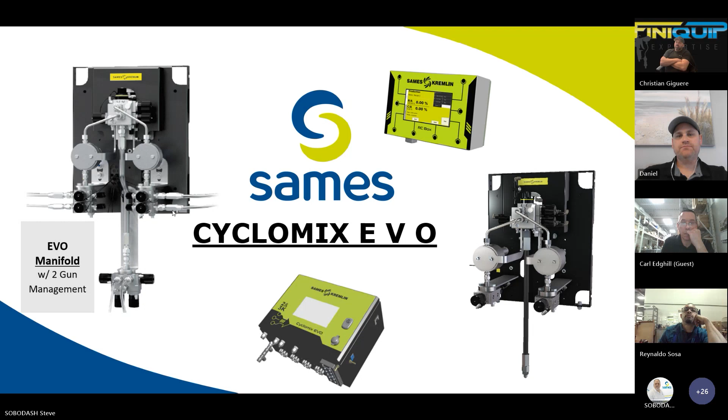We will start with the specifications of the EVO. It can be used as a 1K for just tracking consumption, or 2K and 3K for component mixing. It has compatibility with base solvent, acid catalyst, polyurethanes, and epoxies. The unit is capable of up to 99 different products, consisting of your A, B, and C components combined with solvents. So anything up to 99, this machine can handle.

You can log up to 250 different recipes with ratios ranging from 1% to 200%. Flow rates from 50 to 7,000 cc. The EVO can mix material up to 3,000 centipoise and is feeding 2 circuits up to 240 bar.

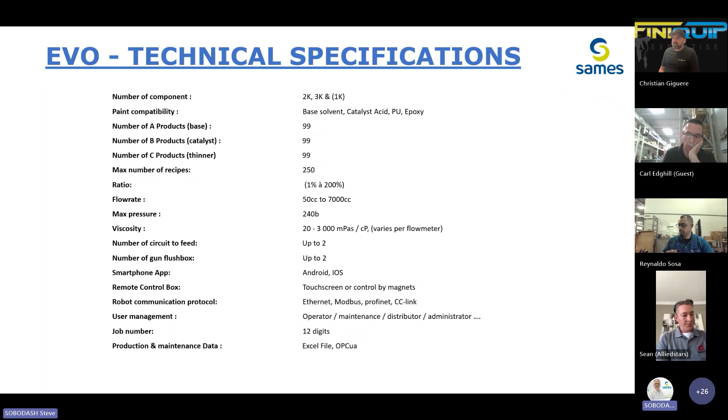There are smartphone apps that can be used on both Apple and Android. The control box is controlled using a touchscreen interface, and there is also a remote box controlled using magnets. External communication can be done with either Ethernet, Modbus, Profinet, or CC-Link. There are also 4 different password-protected management screens: operations, maintenance, distributor, and administration.

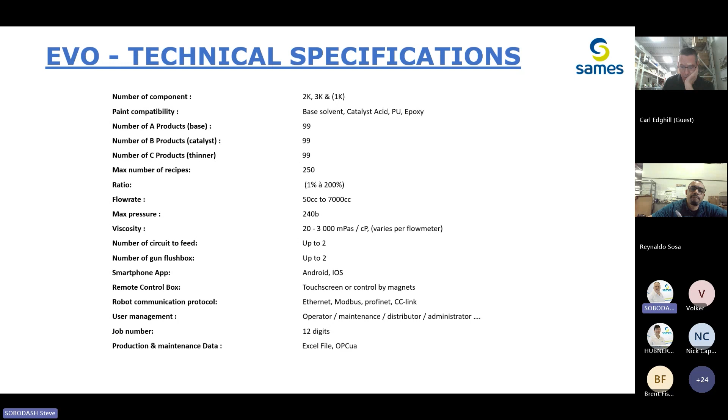You can also calculate production and maintenance data that can be printed off or viewed. The naming of the jobs can have up to 12 digits.

Our EVO base model is comparable with the previous Cyclomix Micro. It's a compact manifold and controller, allowing 2 A-side, 2 B-side components, along with 2 gear flow meters, a mixing block, and static mixer with elements.

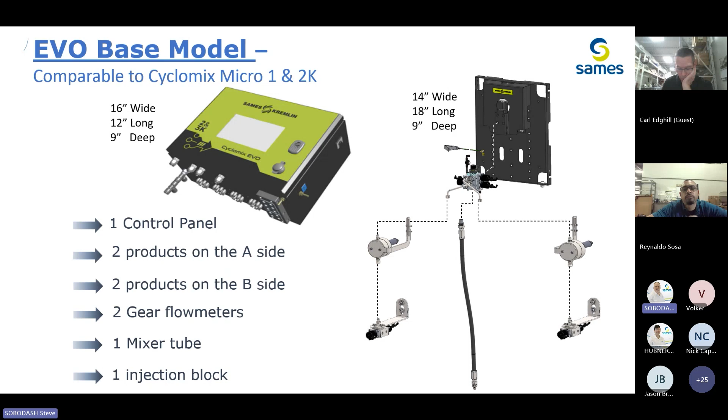Our standard 3K machine comes with 5 A-side color change valves, 2 B-side, 1 C, along with 1 A-side solvent and 2 B-side solvents. It will have 2 gear flow meters, one mass flow meter, and 2 regulators with pressure gauges. This unit will use 4 mounting plates to create the entire manifold.

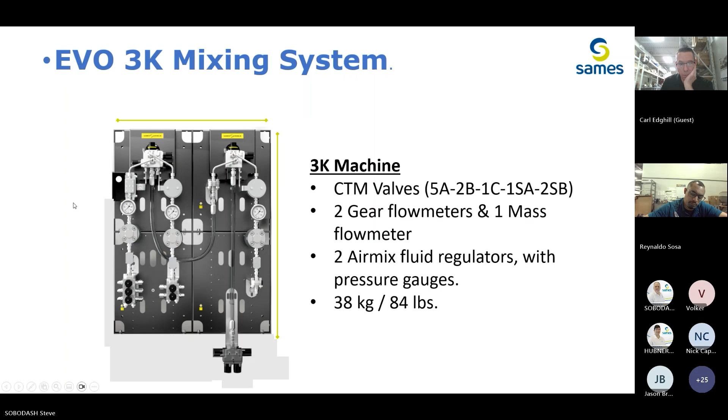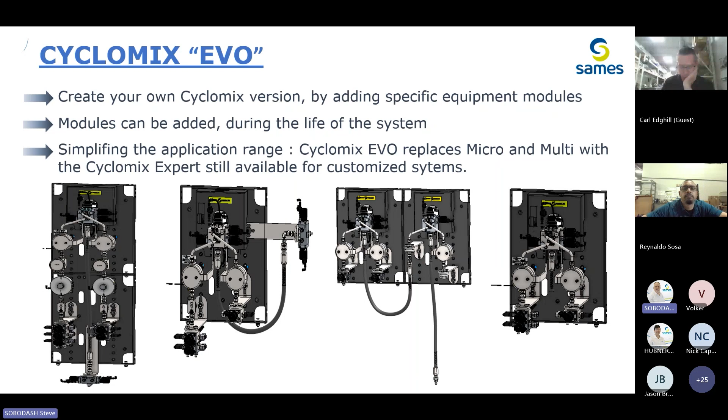The EVO is the most modular mixing system Sames has ever developed. You can create your own specific version of the EVO by adding mounting plates and modular components. This allows for many changes to your system during its lifetime and replaces the previous Cyclomix Micro and Multi, with our existing Cyclomix Expert still available for special customized systems. It will also eventually be replaced by the EVO system within the next few years, but until then, the Expert is still available for special situations.

Speaking to the modularity of the systems, the amount of color change and injection valves, filters, or fluid regulators can be added, along with pressure gauges and sensors. You also have a selection of flow meters to choose from and can select 1 or 2 gun management.

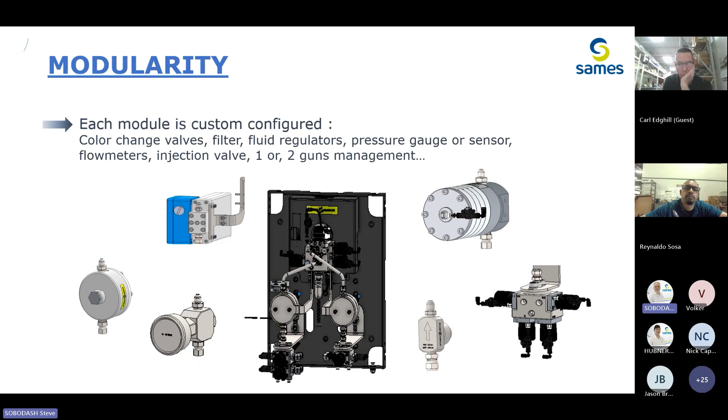Next, we have some of the main configurable parts. There is the entire injection block, the injection valve itself, the injector tip, different versions of flow meters, filters, and air piloted regulators.

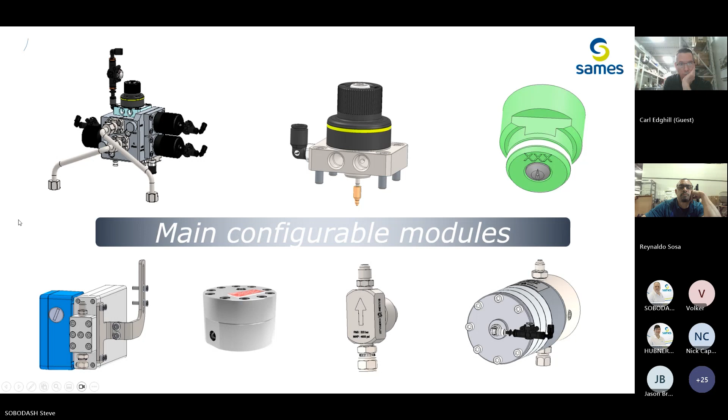For our meters, since we provide both standard and pH versions of the EVO, there are 303 stainless meters and 316L stainless steel versions for acid catalyst. Mass flow meters for 3K, and in the future, a choice of fiber optic flow meters will also be available.

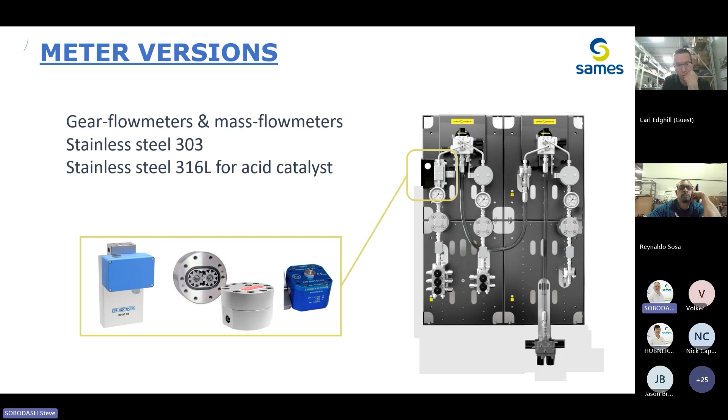Now for the most impressive aspect of the new EVO system. The patented mixing block is a compact stainless steel block to help with pressure loss, allows easy flushing, and comes in both 303 and 316L stainless for the pH versions.

The vertical alignment of the paint circuit on the manifold allows easier flushing and accessibility for maintenance than our previous Cyclomix Multi.

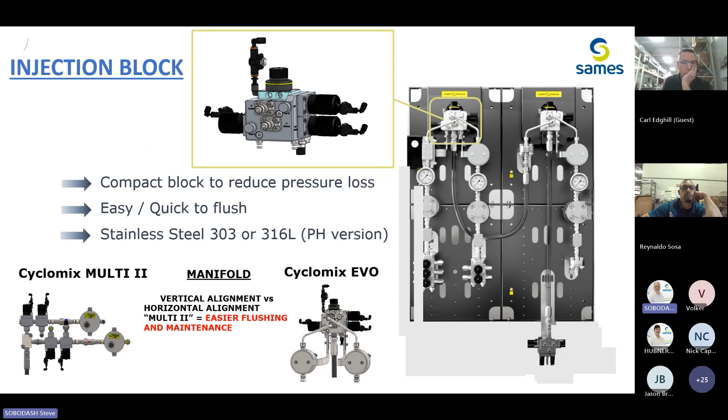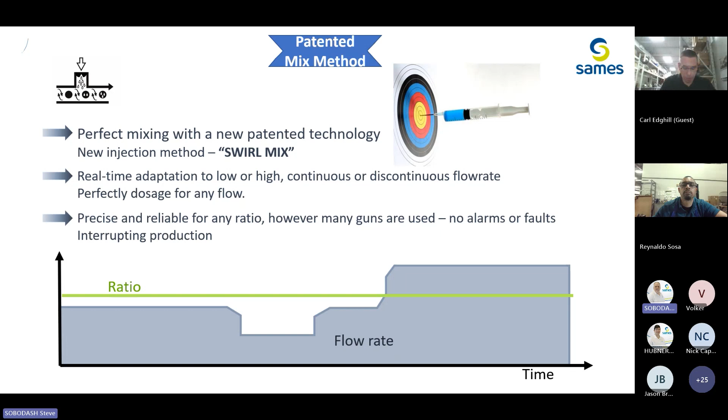The patented mixing method is called Swirl Mix. It provides real-time adaptation of the injection, regardless of flow rates, allowing for precise, reliable mixing, regardless of how many guns are used, and can continually run production without faults or alarms.

Now to explain our patented mixing process. The inlet orifice of the base side is eccentric, meaning off-center to the hole or port. This creates a swirling effect as it passes into the mix block port.

The catalyst is applied via injection spray using a version of our air mix tip nozzle. This mixing method is opposite of previous ways: the catalyst is sprayed first, then the base catches it in its swirling motion. This creates a better dynamic premix of the material, allowing less length of mixing.

The EVO injects on a time-based process instead of flow-based. This is called gain. These processes are proprietary and patented.

In internal studies done by our factory, this method was found to not need a mix tube, as the material was sufficiently mixed without using mixing elements. We would never suggest this, but it goes to show the thoroughness of this mixing method.

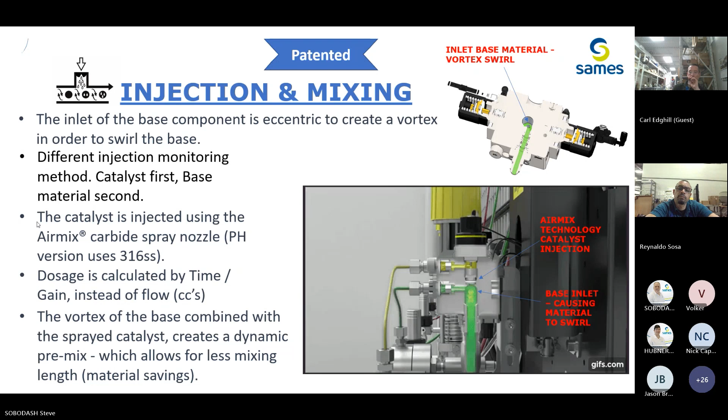The injection block itself is designed with minimal parts and simple maintenance upkeep. The injection valve sits on top with the injector tip mounted underneath, threaded into the block. There are mounting ports for the A and B test valves and the air chop on the sides of the block, with needle valves for batch material and ratio testing mounted in the front.

The fluid inlet fittings, along with the air chop fitting, are actual cartridges mounted with screws instead of threaded into the block. Behind each fitting is a ball and spring check valve. As stated earlier, all components are easily removed for quick maintenance and cleaning.

The new version injection valve is the exact version of our airless ASC gun. It has a quicker activation time than the previous CTM style injection. There are 2 lubricating ports to help keep the shaft and cartridge clean of paint buildup.

There are 2 versions of needle cartridges, in both PTFE and GT style, with the shaft made of 316L stainless steel for better longevity when used with acid catalyst.

Also, the cylinder cap is significantly easier to remove and install than our previous CTM cylinder injector.

The injector tip, as stated, is identical to our air mix gun tips with a seat, seal, and screw holder. The tip is carbide with a stainless steel seat holder injector. The size of the tips are identified on the seat holder itself, just like our standard air mix tips.

They come in 3 different sizes of carbide: 0.61, 0.76, and 1.04 millimeters, with a 2.0 in 316L stainless, which is standard for any acid catalyst version.

There's only one compact Cyclomix EVO control panel. It has a 7-inch touchscreen for any version of the EVO.

There's an additional panel with extra solenoids that can be added to allow 35 more pilot valve outputs. This control panel can also be configured to upgrade existing Cyclomix micro systems, allowing more functions and ease of use than the micro controls previously.

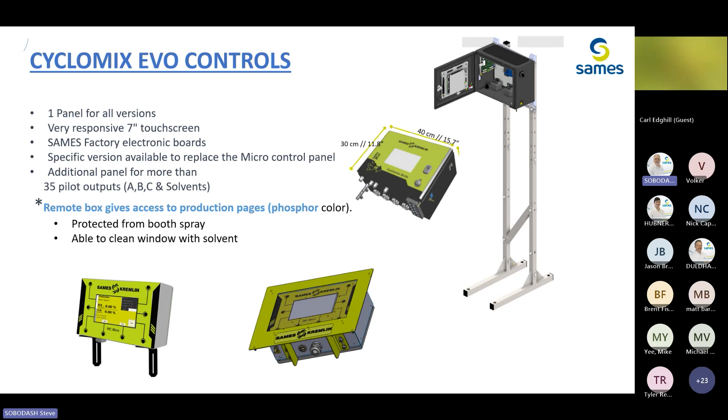A booth-mounted control box is also available for operator use inside the booth.

The main control screen has 6 different function categories and is intuitive and easy to use, even for the most inexperienced users. There is an automatic mode for simple parameter settings, which allows quick startup time after all configurations are entered.

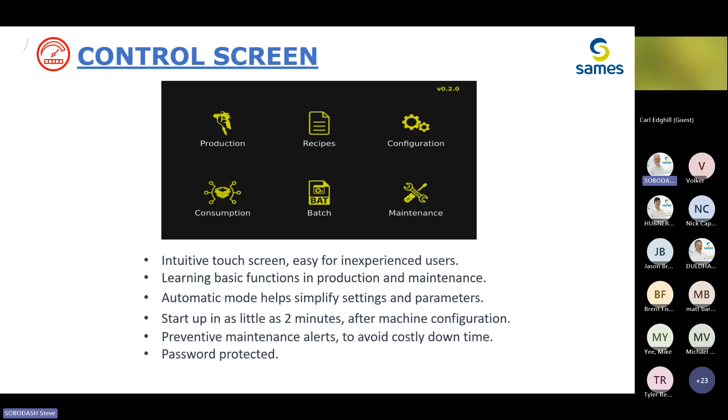The access can be password protected to allow different levels of access for operators and management. Preventive alerts for maintenance levels allow for less downtime due to part failures.

Now, regarding the simplicity of the automatic mode, operators will enter how many components are used, the mix ratio, and the pot life. The EVO will then manage all the mixing, production, and flushing parameters from that point on.

For technicians or operators that are more experienced, there is the ability to manually adjust all parameters for more physical control.

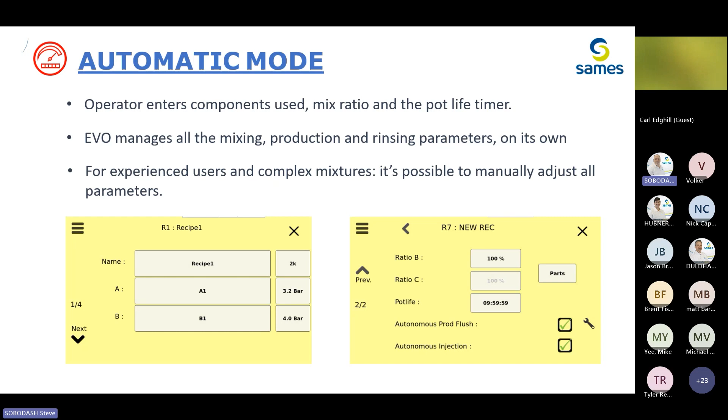With the Cyclomix EVO, there is a new paint optimization method by spraying new mixed material directly following the solvent and current recipe material. You can also push color with color, or push current material with new material. Both of these options can result in anywhere from 3 to 10% less paint consumption.

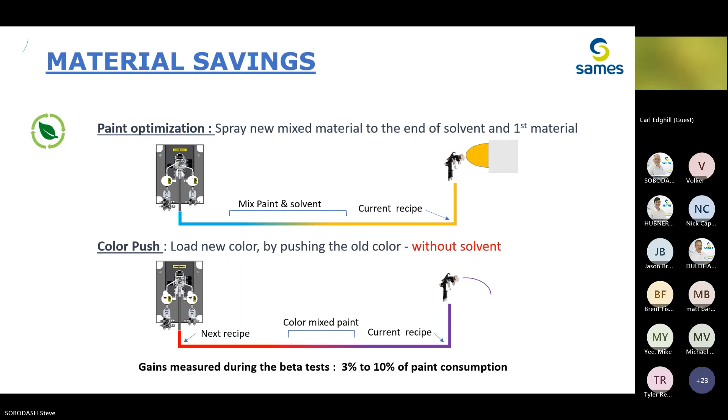Part of the configuration and ordering of the EVO is the addition of mounting stands for both the fluid panel and control box. There are also clear protective covers that can be purchased to safely surround the manifold.

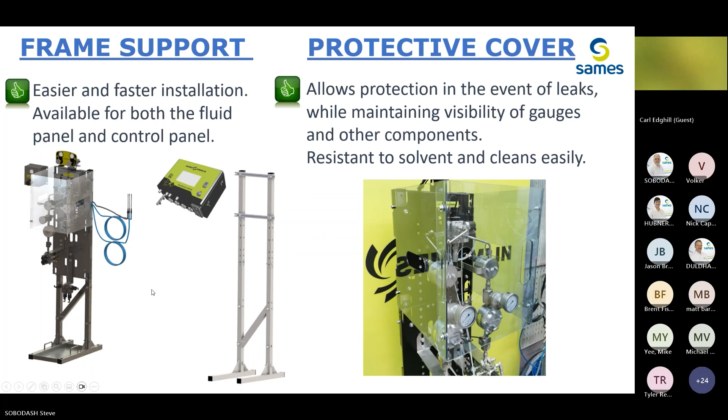Now to show some of the optional equipment that can be incorporated into the system when ordering, or that can be purchased after the sale.

The EVO inlet air must not exceed 6.5 bar or 95 PSI. This air regulator kit, shown with ball valve, gauges, and filter, can make controlling the supplied pressure much easier.

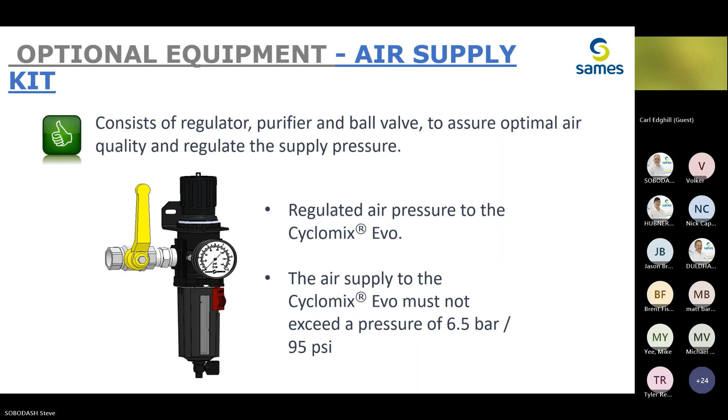We now have mini inline filter assemblies that can be added to the EVO. These mini filters allow for quick replacement and cleaning. They use the same style screens as our Xcite gun filters and can be used in place of or in combination with our super filters.

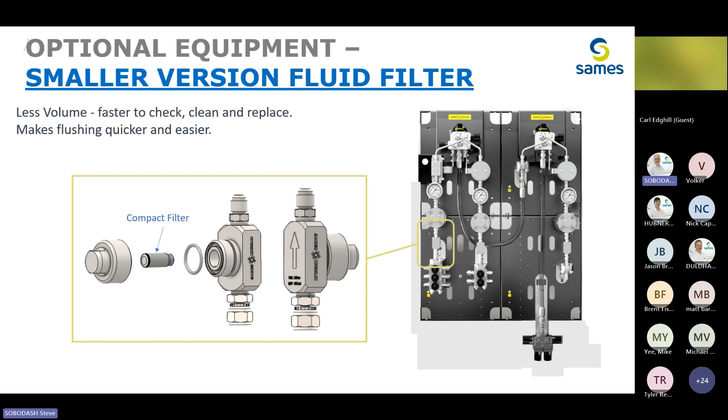There are two versions of dump valves that can be added: one for positioning over a waste barrel, and the other for if you cannot position over the waste barrel, which would allow the supply hoses to be flushed after priming.

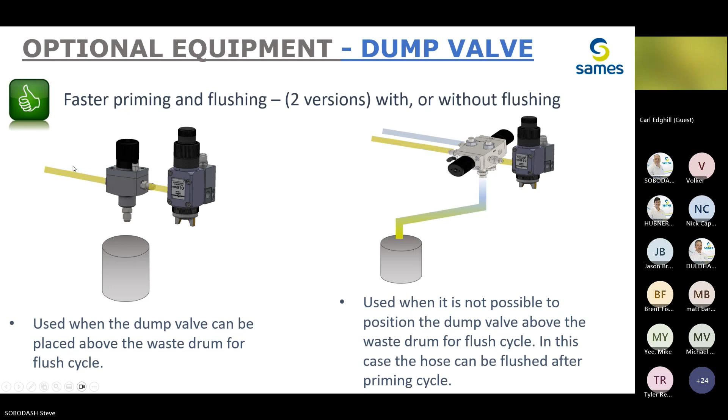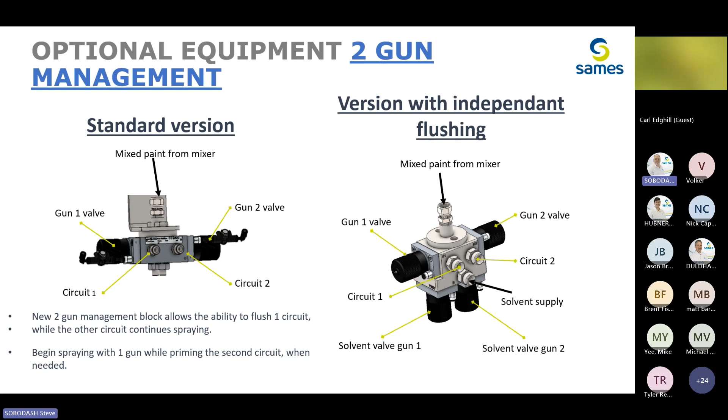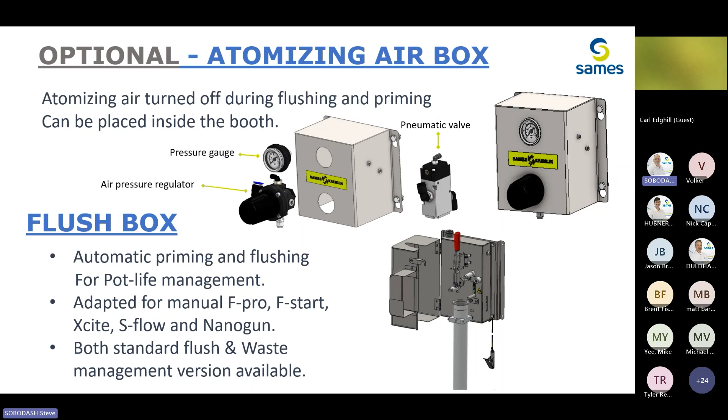Another great feature of the EVO is that it records paint consumption, all valve operations and paint volumes, along with the pressures running through the system.

Soon there will be the ability for cloud-based information storage. It will have a dashboard with shareable information that can be used to control the status of wear parts and help the customer and distributors adapt their inventory levels. You can access the data by inserting a USB memory stick into the control box. A download screen will then appear and instruct the user on how to retrieve the data.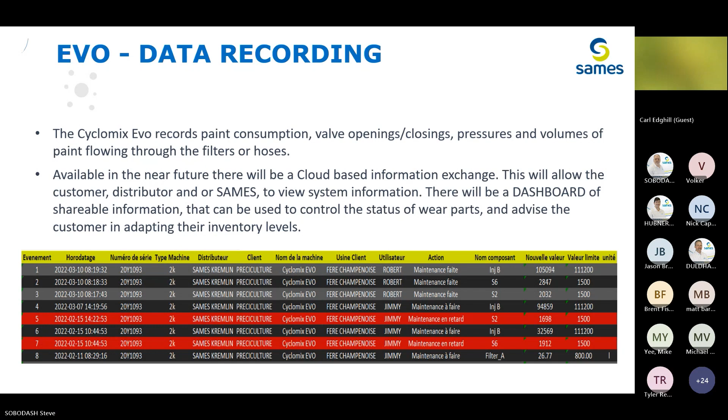And lastly, there will be a smartphone application for both iPhone and Android. As long as you are within the internal Wi-Fi, the apps can allow, with password permission, live views of production and access to maintenance and consumption data, allowing stop, start, and flush of the machine, along with control of all valve outputs. You can also reset consumptions and fault alarms.

Another function coming soon is the ability to log in with a PC and monitor different functions of the EVO from anywhere in the world, as long as you can connect to Wi-Fi. This is hopefully coming along with cloud-based information storage within the next year or so at the most.

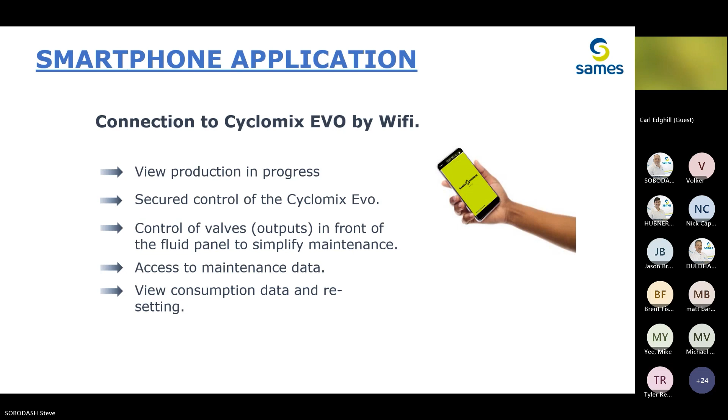So now that you know a little bit about the EVO and its capabilities, let's look at a few things in comparison to the competition.

Graco is the main competition in this market. They have the PD2K and the 2KS. Wagner is also up there; their units are the 2K Comfort and the 2K Smart. Carlisle does offer the IntelliFlow series machines, but is a lesser player in the market for SAMES.

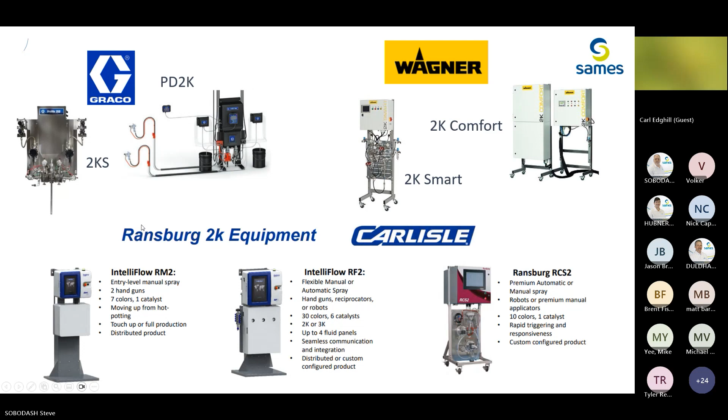For some comparisons, we will use the Graco and Wagner machines. Total components for SAMES is 99, as stated. For Graco 2K and 3K, there are only 37, and with Wagner 2K and 3K, only 50 and 65 components combined. The Wagner unit does have 4K capability with up to 80 colors, which EVO does not.

Graco only allows one solvent per component, and on the PD2K, the maximum pressure is only 105 bar, whereas the EVO allows up to 240 bar. The Wagner cannot handle low pH level material, whereas the EVO and Graco versions can.

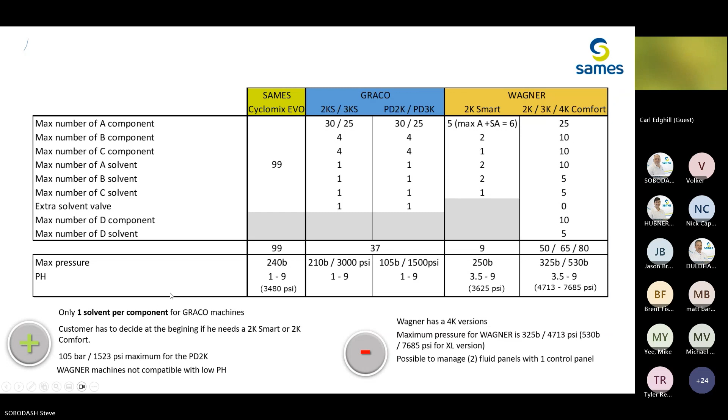When it comes to injection, Graco uses sequential dosing, injecting B into A inside a mix tube. This can cause difficulties in mixing with changing flow rates.

Wagner's mixing is similar to the EVO, but does not have an injector to direct the catalyst into the center of the stream, which can cause what they call sidewalling of the catalyst, making it very difficult to get a proper mix.

Speaking to the HMI touchscreens, the EVO has the largest of the three systems, measuring over 15 centimeters in width and over 9 centimeters in height.

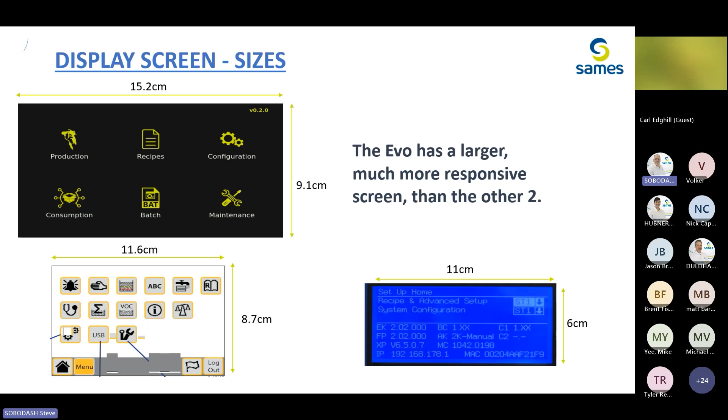Lastly, while on the production screen, the EVO has all the data shown and is clearly identifiable, with the possibility to zoom in on the flow rate and ratio readouts, where neither the Graco nor the Wagner units can do this.

The biggest advantage SAMES has over the competition is once you configure a unit over 3 colors, our addition of more product raises the price in minor increments, whereas with Graco you must move up to a whole new tier of machines that could add $50,000 or more.

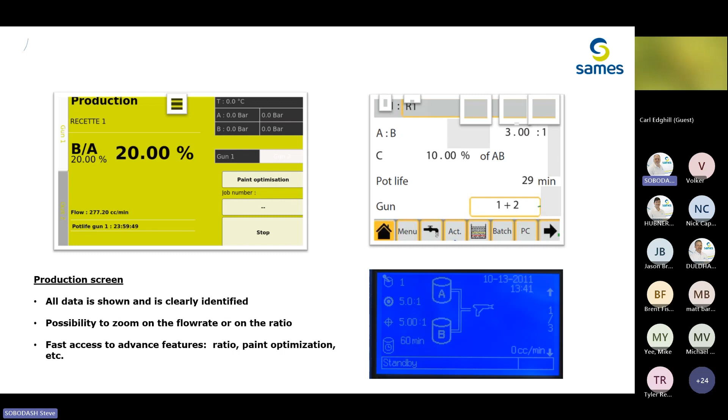So that concludes our introduction to the Cyclomix EVO.

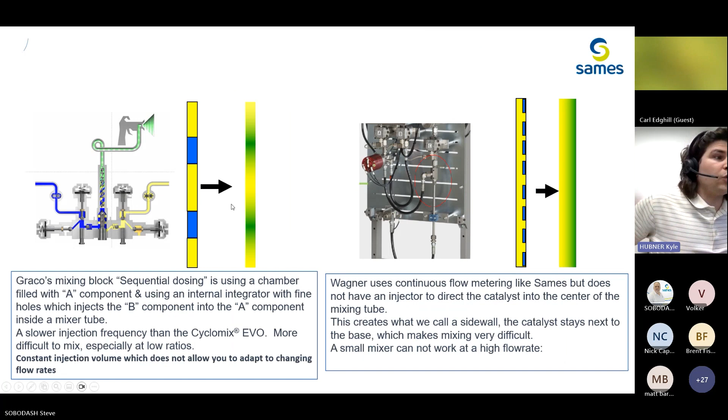Yes, and here in our office we actually use just tubing, a couple strands about 4 or 5 inches long, and then we inject the fluid in that and put little caps in the tubing, and it's basically see-through so you can tell where the levels are. This is the feature we've been wanting to add to our valves for a while, and finally with this ASC style gun trigger valve we were able to do that. Yeah, it helps not only with lubrication, but it creates an air barrier as well.

Benny just said catalyst ratios for 1% and up. I haven't done a 1%, we've done 3 and up. Steve, I don't know if you've seen anyone as low as 1% yet. Not with this unit, no. Okay, no one's called that.

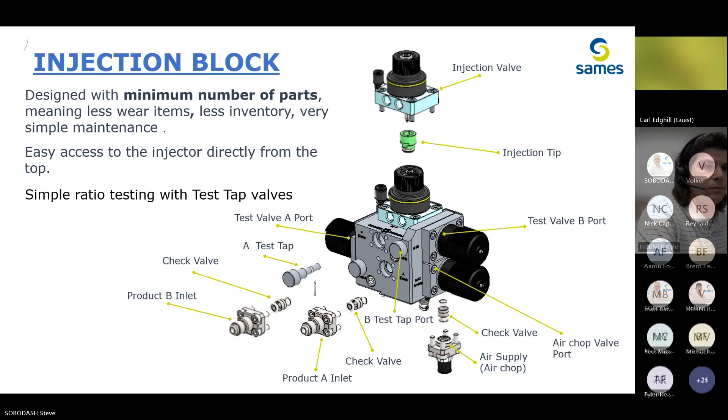Thank you. Sorry, I was coughing. Oh, preventive maintenance alerts pre-programmed.

So, yes. Sorry, Steve, can you take over there? Yeah, on the chat, where are we at here?

Yes, you set the program for the alerts and the amount of time. You can set it by various ways - by volume, or by injections for the valves. You set the amount that you want your maintenance levels to be, and it'll pop up on the screen whenever you hit that level. So all your preventive maintenance, I think there are some preset parameters in there, but you can go in and set it for however you want. You want to set it for 1,000 cc's or 10,000 cc's, or for when it comes to valves, if you want to do it for 100,000 activations or whatever, you can do that. So everything in preventive maintenance you can set. And once it gets to that level that you have set, it will pop up. It won't fault or anything, it'll just come up on the screen telling you that you've reached a level that you set.

Just to make sure I understand your question fully there, could you maybe come on and explain? Which one is this? Is it possible that the check valve at the base of the injector block is completely closed?

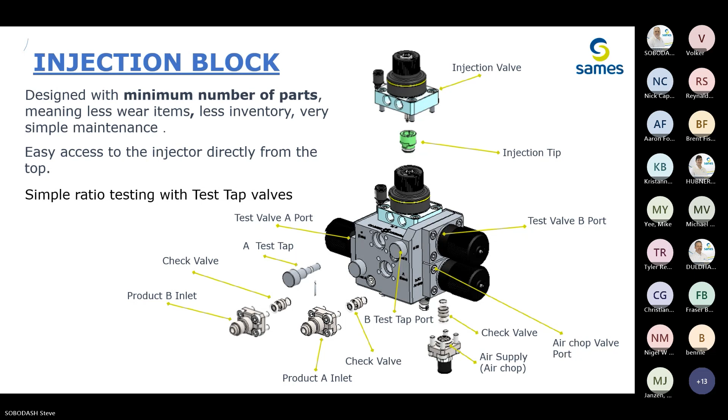Thanks for the question. One more before you go - that injection tip, what's the size again for that tip? Let me check the screen. There are 4 sizes altogether: 0.6, 0.7, 1.0, and 2.0.

The 2.0 comes standard, and it's the only one we use with 316L. But there are 4 different sizes of injectors you can restrict your paint with. All right, thank you. No problem - anything else come across?

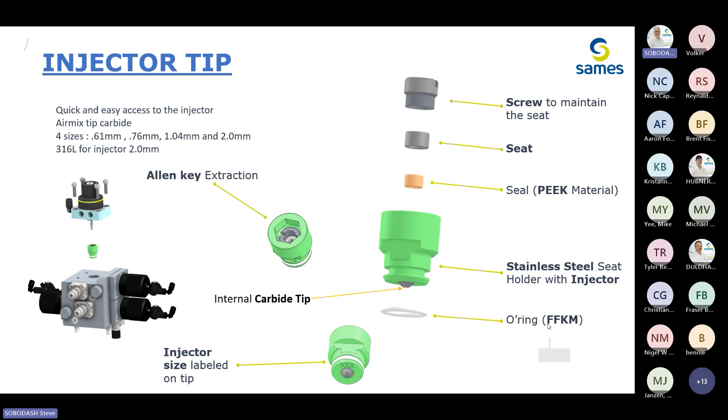Yeah, Volker, recommendations on the best cleaner to use to flush the catalyst. That's totally dependent on manufacturers' specifications on their products - we can't say what to use for cleaning it. It's got to be the recommendation from the coatings supplier. Some coatings, even though viscosities and flow rates and everything are the same, are just more difficult with their formula to clean. Some manufacturers suggest real harsh solvents, and others don't need it.

Sticky valves can be alleviated if you do the lubrication process as well, because you don't have air coming in to react with the catalyst if it's a polyurethane, let's say. So the lubrication syringes on the injector would be a help there for sure. Thank you.